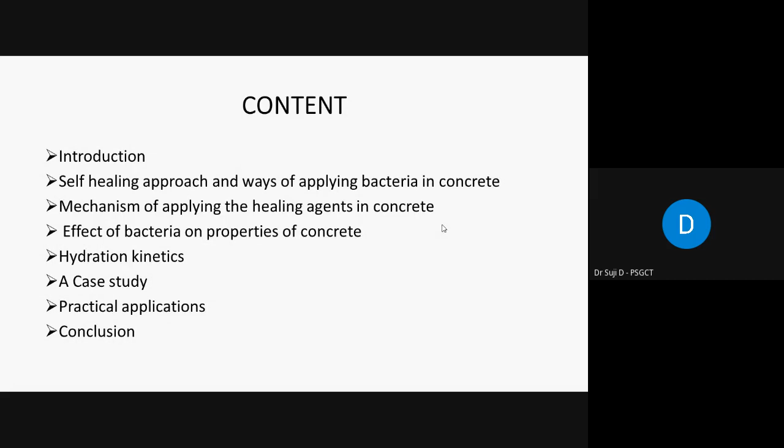I have arranged my presentation in this way: a brief introduction about self-healing concrete, self-healing approaches, ways of applying bacteria in concrete, mechanism of applying the healing agents, effect of bacteria on the properties, and a small hydration kinetics to make you understand. A small case study, if time permits, I will show, otherwise we can discuss it in the later stages, and some practical applications, and then let us conclude the session.

As we all very well know, due to the availability of raw material, affordability and durability, concrete is a widely used material all across the globe, and it also has superior compressive strength. However, a lot of concrete structures, including infrastructures like bridges, dams, etc., invariably suffer degradation and deterioration over a period of time.

This is due to the permeation or percolation of water, which affects the efficiency—efficiency here meaning the strength of the concrete. So one of the major causes of such deterioration is the formation of cracks. So the formation of cracks are in... let me highlight. Okay.

The formation of cracks is inevitable in concrete. These cracks may be either at micro level or macro level, which causes passage for dissolved particles in fluid.

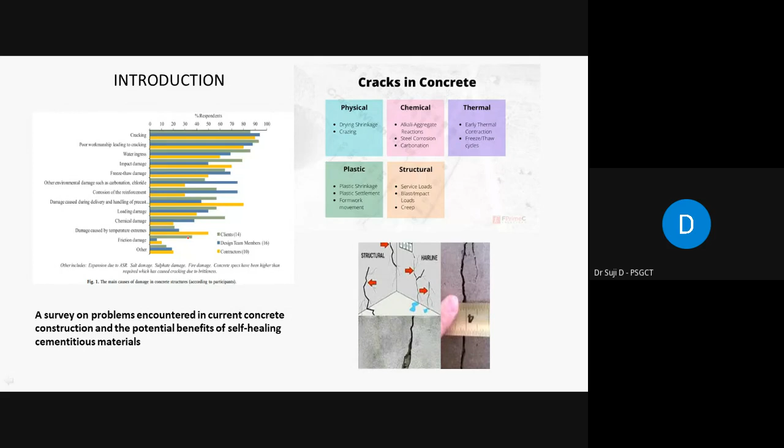Now, as I told you, conventionally there are different types of materials and methods that have been adopted to control the cracks or to mitigate the cracks or to arrest the damages which occur in concrete.

Various repairing techniques are available as of now, but they are highly expensive and time consuming processes. Concrete repair normally refers to bringing the structure back to its original form or regaining its original strength. So it can be classified either as cosmetic repair or sometimes rehabilitational repair, depending upon the type.

These repairing techniques or methods are classified based on types of cracks. You might have studied various types of cracks like live cracks, dormant cracks, voids, hollows, and honeycombs, scaling damage, spalling damage. We cannot simply use a single recovery or damage retrofitting measure applicable to all types of cracks. So it depends upon the type of defect, and accordingly the repairing methods vary.

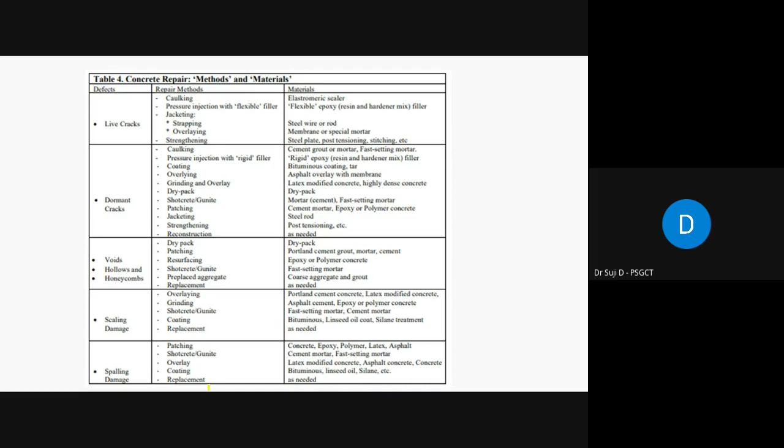So because of all these reasons, we have to go with an alternative approach called the self-healing approach. The modified cementitious form of the conventional concrete using such an approach is called self-healing concrete. Self-healing concrete is defined as the ability of the concrete to repair its cracks autogenously or autonomously.

There are two methods by which the self-healing process can be done: one is autogenous and another is autonomous. So it is called self-repair. Another name of this self-healing concrete is self-repairing concrete.

It imitates nature, like the automatic healing of our body wounds by the secretion of some kind of material. It mimics nature, so it is a biomimetic material.

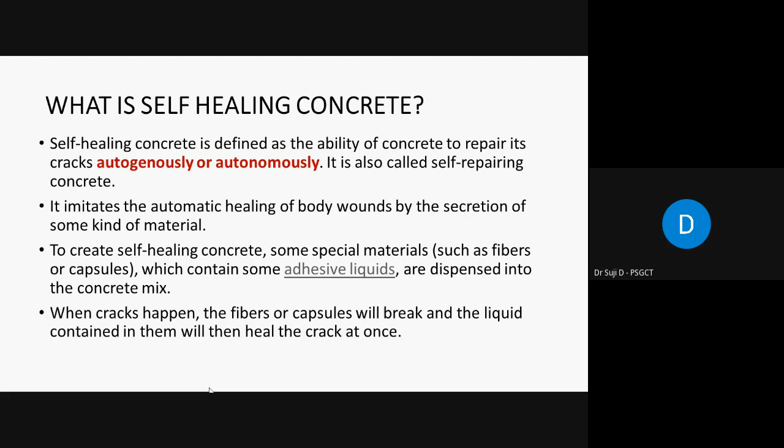To create self-healing concrete, special materials such as fibers or capsules, which may contain some adhesive liquids, are dispersed into the concrete matrix. When cracks happen, the fibers or capsules mixed along with the conventional concrete or cementitious system will break, and the liquid contained in them will disperse outside and heal the crack at once. This is a simple mechanism.

As I told you, this can be compared with nature: the wound initiation in our body, blood clotting, cell proliferation, and finally wound healing. So it somewhat mimics nature, and hence it is called self-healing.

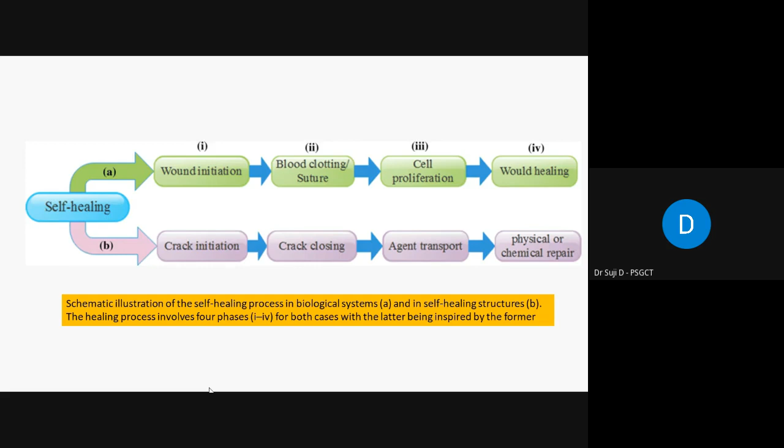This is the schematic illustration of the self-healing process in biological systems. The upper one, A, is the self-healing structure of the biological system, and B below is the one conventionally used in our systems. So we can imitate or mimic nature, or compare it with our conventional system that we are using too.

So there are certain major mechanisms of the self-healing approach. As I told you, the self-healing mechanism is defined as a process. It can be any process we follow, but by using it, the material itself finally ends up with a recovery and improvement of performance after an earlier action that reduces the performance of the material. So any material, any process, either autogenous or autonomous, we can follow, but finally the material heals itself. This is the basic definition.

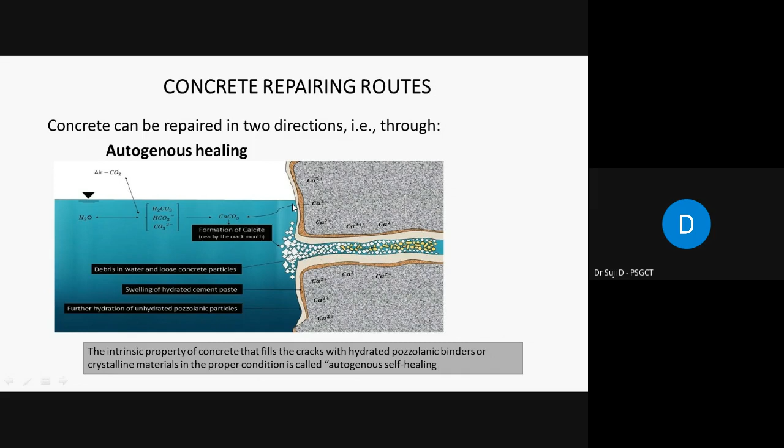In autogenous healing, the self-healing process takes place with products formed in the presence of carbon dioxide, dihydrate and water. Calcium silicate hydrate is our hydrated gel, formed due to the hydration of unhydrated cement with water.

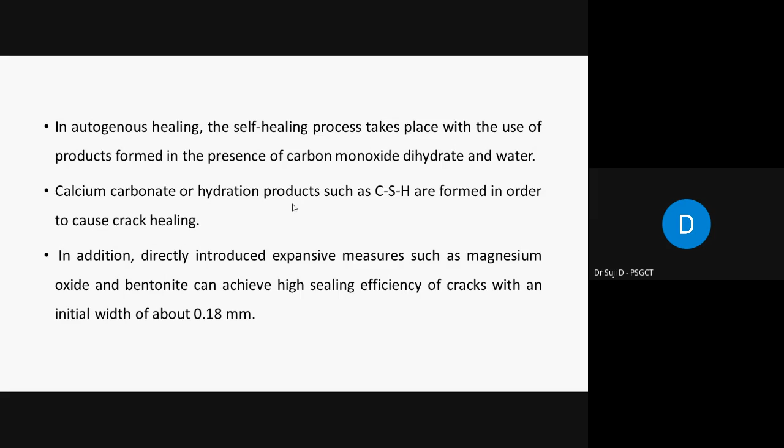In addition, expansive measures such as magnesium oxide and sometimes bentonite clay can be directly introduced to achieve high sealing efficiency of cracks with an initial width of about 0.18 mm. So if you have micro cracks of this range, definitely all these cracks will be autogenously healed by the natural healing process.

Now, what is meant by autonomous self-healing? According to RILEM Technical Committee, it is defined as the process of healing with material components that are specifically added into concrete for this purpose. That means they are called engineered additions.

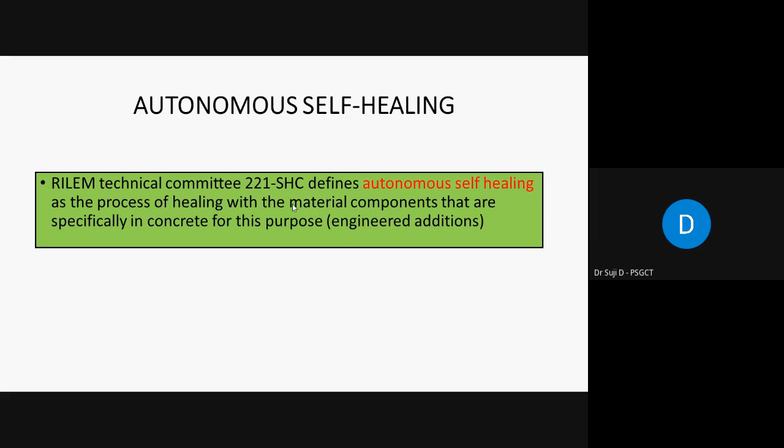So some type of additive materials in different forms are added to the cement or concrete to activate or further improve the natural healing process. That is called autonomous self-healing process. Among these, there are different types of autonomous self-healing processes, different methods by which it can be created. One among them, as I told in the beginning, is bacteria-based. Apart from that, there are a few other methods also used to bring about this autonomous healing process.

So let us look at that one. There are different materials used to bring in this autonomous healing process. One is utilization of bacteria.

As I told you, there are two processes: autogeneous and autonomous. Autogeneous is repairing itself naturally, whereas in autonomous, we have to give some additional engineered materials or substances to bring in the self-healing ability or process. So in the autonomous healing process, there are different types of materials used.

So what are all those different types of materials? Let us look at one by one. The major material used for this type of autonomous healing is bacteria. And not all bacteria, only some selective type of bacteria could be used for bringing in the self-healing property.

Apart from bacteria, some other mineral admixtures are also being used. They have a capability of forming this crystalline or expansive products while it is being initiated.

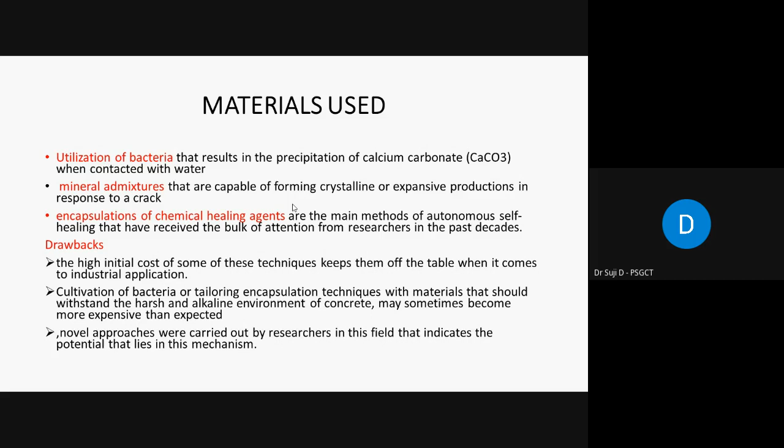So novel approaches were carried out by researchers in this field that indicate the potential that lies in this mechanism. So the mechanism is very well being appreciated to overcome the above said drawbacks.

So the self-healing concrete, as I told you, is of three broad domains: natural self-healing process, biological self-healing process, and chemical self-healing process. The natural self-healing process follows blocking of cracks, which forms calcium carbonate precipitation and blocking of the cracks by impurities, and further hydration of unreacted cement or cementitious materials, and finally expansion of the hydrated cementitious matrix and the final finishing of all the cracks.

Then biological self-healing process is a different one. As the chemistry of this self-healing process I have already explained. This is the biological self-healing process using different types of bacteria, and chemical self-healing process using capsules, shallow pipettes, and sometimes vascular networks. Let us see one by one.

There are two different modes of using chemical self-healing process: passive mode and active mode. And while coming to biological self-healing, biological precipitation of calcium carbonate is due to bacteria, and precipitation of polymorphic iron aluminum silicate is also possible due to some researchers who have conducted experiments and concluded this.

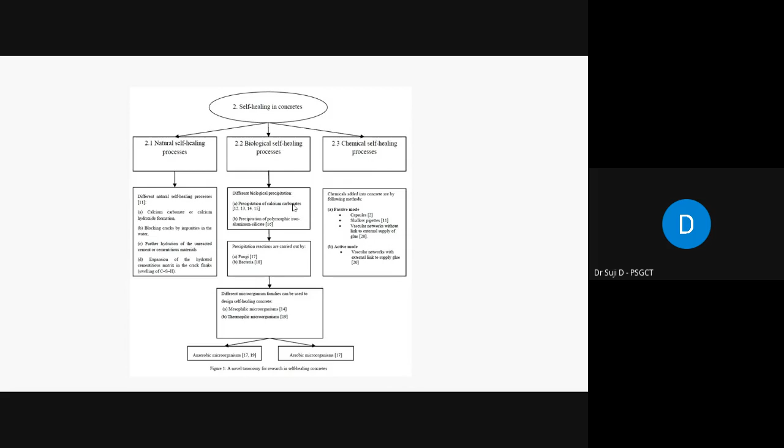Under this domain, there are two others: anaerobic microorganisms and aerobic microorganisms. I'll explain all these things later.

There are various causes that induce the self-healing mechanism. As I told you, the mechanism is the heart of the success of any self-healing concrete. The success is based only on the mechanism. The various causes inducing the self-healing mechanisms are physical, chemical, and mechanical.

The physical causes include swelling of the cement matrix near the crack opening due to absorption of water by the hydrated cement matrix. So we have a cement matrix, right? Once the crack is open, some micro cracks are open, so the cement matrix should be in a position to absorb the surrounding water. That is the physical cause.

The chemical causes can be attributed to two main processes: one is continual hydration of the Portland cement, and the other is formation of calcium carbonate. This is the chemical cause. Then the mechanical causes finally end up with autogeneous healing—it fills the cracks with fine particles originating from the broken concrete surface itself, or it may be transported to the crack by water. So these three causes induce the self-healing mechanism.

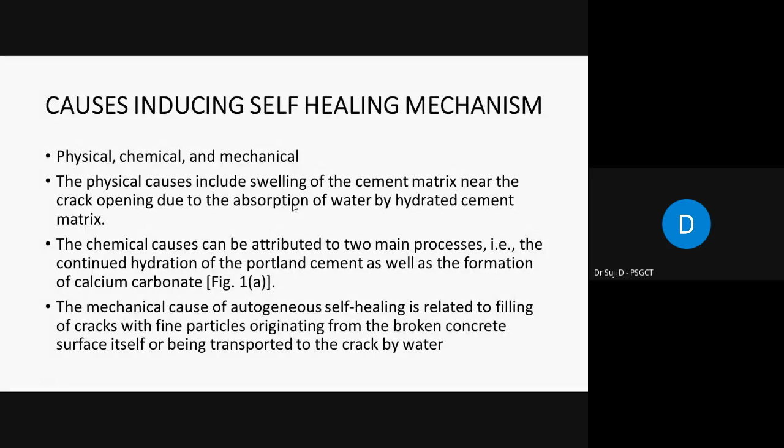This is the model of 5 steps taking place within these three processes: physical, chemical, and mechanical—swelling, continued hydration, calcium carbonate formation, and the mechanical cause of broken off fracture surface originally in the water. These mechanisms are common to all types, whether natural, biological, or chemical. This is the basic mechanism.

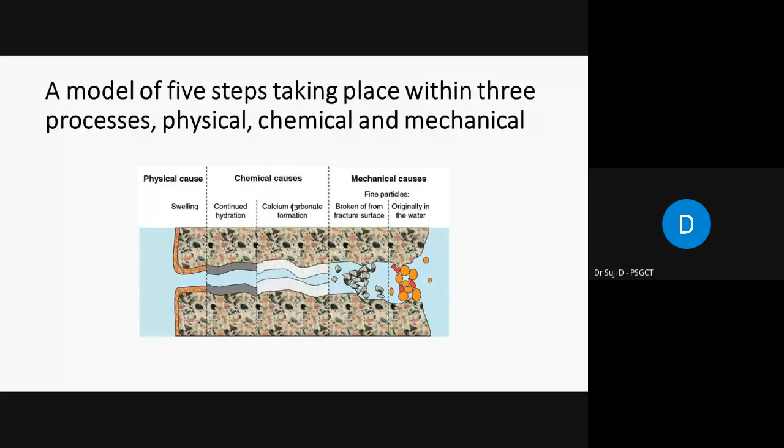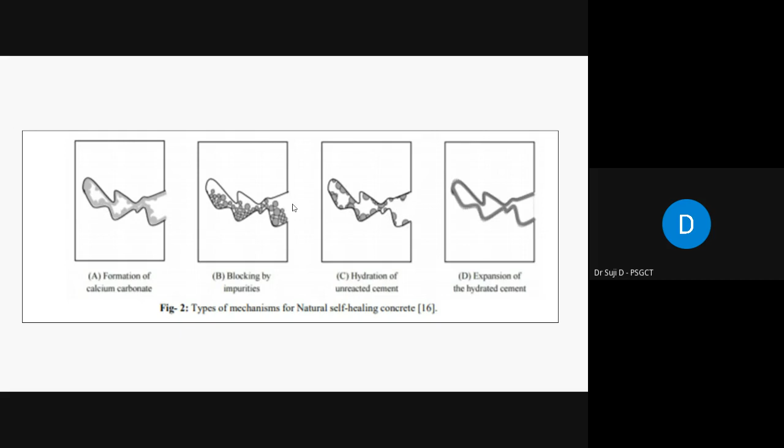So this is the chemical reactions that I have explained: the formation of calcium carbonate, blocking by impurities, hydration of unreacted cement, expansion of the hydrated cement. These are part of the natural process.

Now let us come into the chemical self-healing process. This is one of the novel techniques. Here we are using chemical substances—another way of healing the concrete by injecting chemical components into the concrete.

Several researchers have attempted different types of chemical substances for their concrete. This is called artificial healing, as opposed to the previous one, which is natural healing. Some researchers name it artificial healing.

To design chemical self-healing materials, various types of glues are used. The major techniques used in this chemical self-healing process involve glues, and these healing treatments use hollow pipettes and vessel networks which contain glue. The vessel networks use encapsulated glue. I'll explain one technique: vessel networks and hollow pipettes which contain glue.

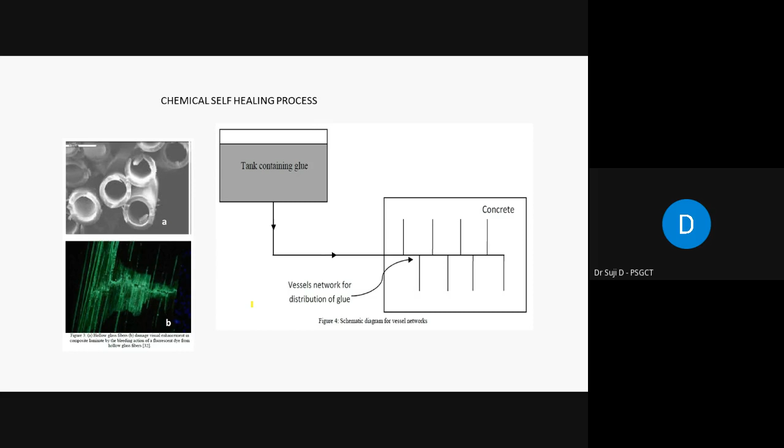So you can understand very well about this mechanism. This is the crack being propagated into the concrete, and vessels connected to external tanks contain glue. Once the formation of crack is initiated, minute networks propagated inside the concrete area rupture due to internal stress, similar to our blood vessels rupturing by the crack. Since it already consists of a glue-like substance, once cracked, the glue-like substance enters into the crack and heals it. This type of research has been carried out by a few researchers.

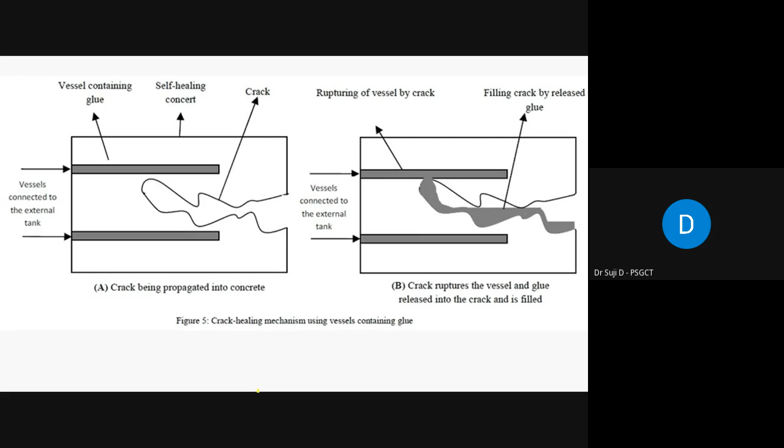But as I told you earlier, upscaling these mechanisms to bring into reality is very, very difficult because of the cost involved and the huge research technical gaps that are there. So in order to sort out all these problems, further research is still needed to bring this into reality.

This is encapsulated glue, another form of technique. Here, as I told you, it is like small capsules, microcapsules, or it may be nano capsules, which carry the glue as a self-healing agent. These capsules may be dispersed in the concrete matrix.

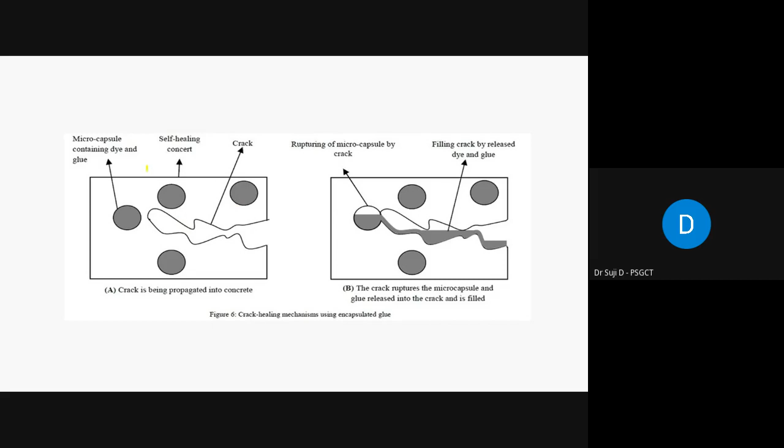One researcher attempted this microcapsule technique for self-healing concrete. When the crack initiates and meets the microcapsules, due to internal stress it may fracture or break. The material filled in the capsules can then enter into the cracks and heal them. So there are different ways: the vascular technique, another type of chemical self-healing process or artificial healing process, and this micro-encapsulated healing process.

And this is the schematic diagram of crack healing by microorganisms. This is called biological concrete or bacterial concrete. It is a new objective or new area in civil engineering, under modern concreting technology.

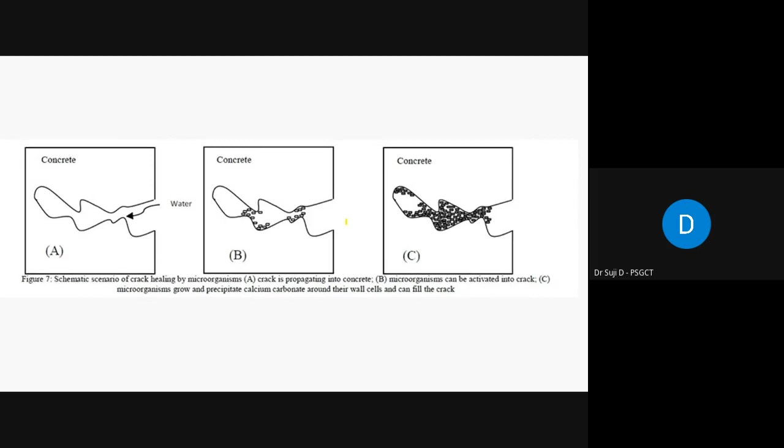This bacterial concrete basically depends on microorganisms, which are majorly used for bacterial concrete. Sometimes these microorganisms can be directly dispersed in the concrete, or sometimes carriers are needed to carry the bacteria into the system. Different mechanisms are tried, and one of them is microorganisms filled in the form of a capsule dispersed in the concrete. During expansion and further stresses, the capsules break, releasing the microorganisms and causing the healing process.

So the biological self-healing process attempts the use of microorganisms to design self-healing concrete, which is called bioconcrete. Bioconcrete can grow almost anywhere, since microorganisms can be seen everywhere. Wherever you look, there is definitely some microorganism present; they are invariably present everywhere.

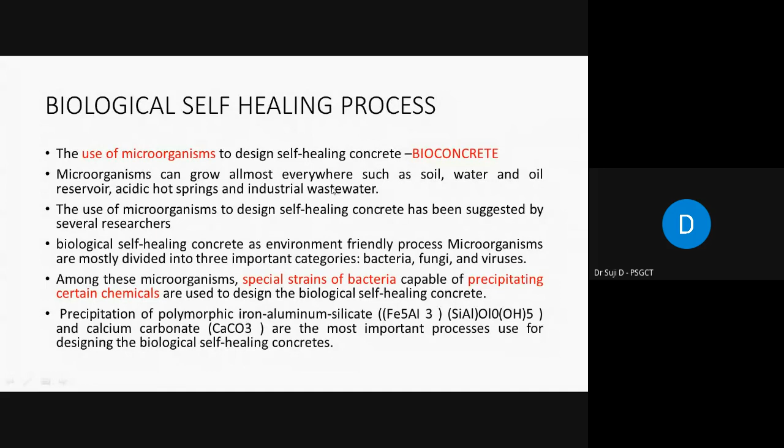There are different process routes. One is that microorganisms can be added to the concrete through different approaches, such as addition of microbial broth directly into the fresh concrete. That means when microorganisms of a certain quantity are dispersed in concrete, they will cultivate themselves within the concrete. This is called microbial broth directly into the fresh concrete.

Sometimes spore forming bacteria are also used, because in order to withstand the alkaline environment, spore forming bacteria are very effective. This spore forming bacteria is also attempted to use for mineral precipitation. Sometimes immobilized form onto silica gel or activated carbon is also used. These microorganisms can be used either in mobilized form, where they are active always within the concrete, or in immobilized form, where whenever a crack opens and reaches an oxygen source, it will enter into the reaction. That is called immobilized form, using silica gel or activated carbon.

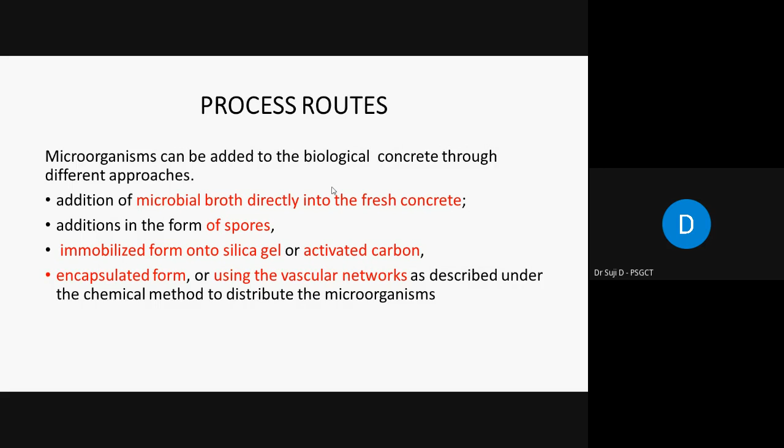What are the controlling factors for growth or activation of this bacterial precipitation? One is the pH of the concrete pore solution, which controls it and depends on the type of cement being used. The pH, temperature, and moisture content of the concrete are typically not suitable for the growth of bacteria. Actually, high pH, high temperature, and high moisture content are all unfavorable conditions.

Only the optimal parameters are selected for a particular type of microorganism used, since this is not uniform for all microorganisms. The type of bacteria you use depends on different optimal conditions that you have to check out. Hence, in certain cases, resistant forms of bacteria, the spore forming bacteria I mentioned earlier, are used instead of fresh microbial broth.

Alternatively, encapsulated microorganisms can also be used to withstand the harsh conditions of concrete, though this is a highly expensive and complex method. The use of vascular networks is also encouraged to distribute microbial broth throughout the cementitious matrix, which is another way of protecting the microorganisms from improper conditions. However, all these approaches are complicated and subject to lack of constructability using current technology, so they remain at the theory level only.

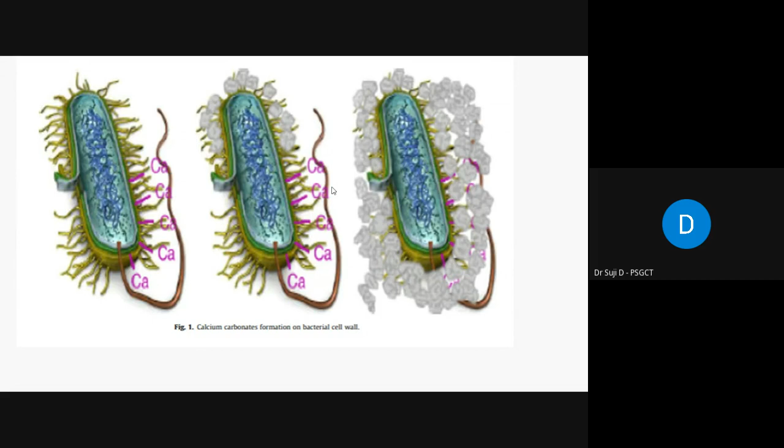Next is identification of bacteria and development of bacterial concrete. This is a typical bacterial cell wall and precipitation using single cell microorganisms. Microbial mineral precipitation comes from the metabolic activities of useful bacteria in the concrete. As mentioned, not all microorganisms are suitable; only mineral precipitating bacteria are selected.

This process might take place inside the cell wall, or sometimes outside the microbial cell, or sometimes it may happen within the concrete itself. Bacterial activity frequently causes a change in the solution chemistry, resulting in oversaturation and mineral precipitation. So the application of these biological concepts to concrete could lead to the development of a novel material known as bacterial concrete.

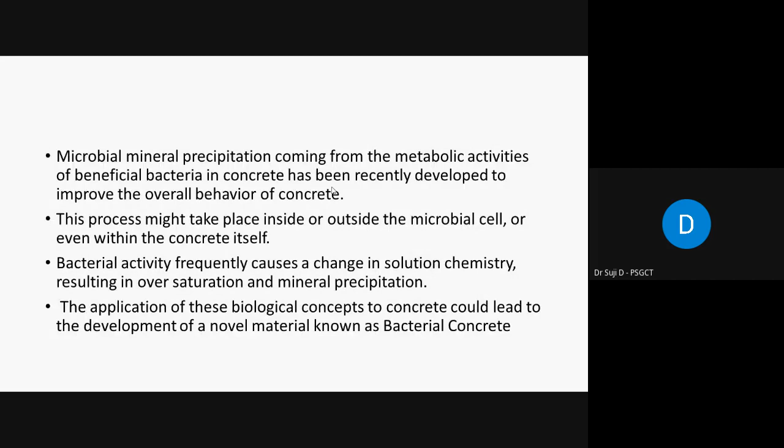Historical perspective: bacteria are a single cell species. They occur in varying forms and sizes. They are omnipresent everywhere in the ecosystem, and are also available in organic matter, plant and animal life bodies. Typically there are 40 million bacterial cells in 1 gram of soil.

The first person who discovered bacteria was Antony. In 1676, he discovered bacteria using a single lens microscope. Christian Gottfried introduced the word bacteria in the 19th century, and Louis Pasteur in the 19th century showed that the process of fermentation is caused by the proliferation of microbes. Pasteur was an early advocate of the germ theory of disease along with his contemporary Robert Koch.

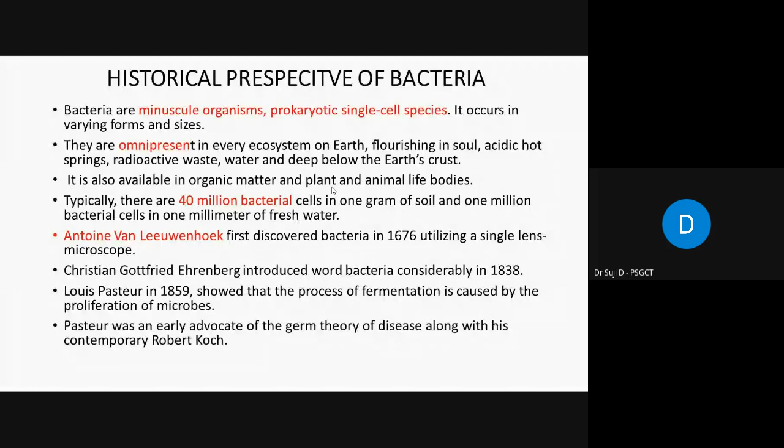Based on Pasteur's name, there is one bacteria, Bacillus pasteurii, which is another type of microorganism. Gram positive and gram negative are the two broadly classified cell wall types of bacteria, named from the cell reaction. Gram staining is a method of differentiating bacteria, a test procedure for diagnosing the taxonomy of bacterial species. So gram positive and gram negative are the two broadly classified types of bacteria based on cell wall type.

Bacteria are generally cultured in the laboratory using a solid medium or sometimes a liquid medium. Solid growth media like agar plates are used to isolate bacterial strains from pure cultures. However, liquid growth is also employed when growth measurements or high cell volumes are needed. If you stir the liquid media continuously, it will use this liquid as a medium for the growth of bacteria.

This bunch of bacteria can be easily split and transferred, but it is difficult to isolate a single bacterium from the liquid medium. The use of selective media can aid in identifying certain organisms.

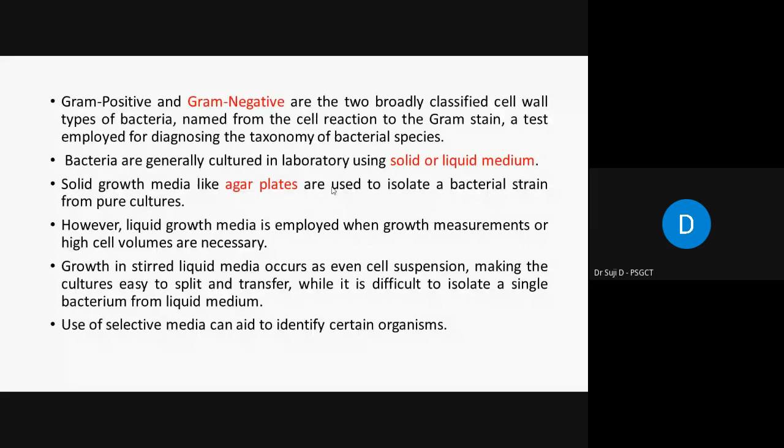There are several stages of bacterial growth: the lag phase, stationary phase, death phase, and log phase. Bacterial growth normally follows all these four stages of development.

When a bacteria population first enters a high nutrient environment that allows for growth, the cells must adapt to their new environment. This is the initial phase — the bacteria is given some food so it can grow into larger numbers, and for that, some nutrient is needed. When the bacteria population first enters a high nutrient environment that favors growth, the cells must adapt to their new environment.

The first growth phase is the lag phase, a period of slow growth. Initially the growth of the bacteria or microorganisms will be slow. Then when the cells adjust to the high nutrition environment and prepare themselves, rapid development takes place. The lag phase has high rates of biosynthesis, where proteins are created which are needed for rapid growth.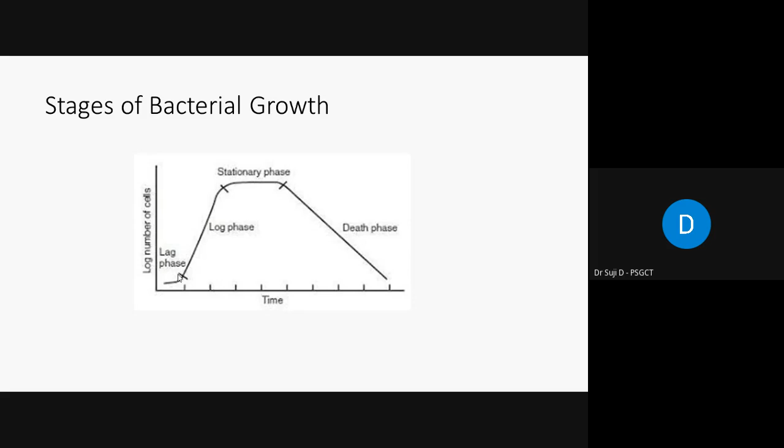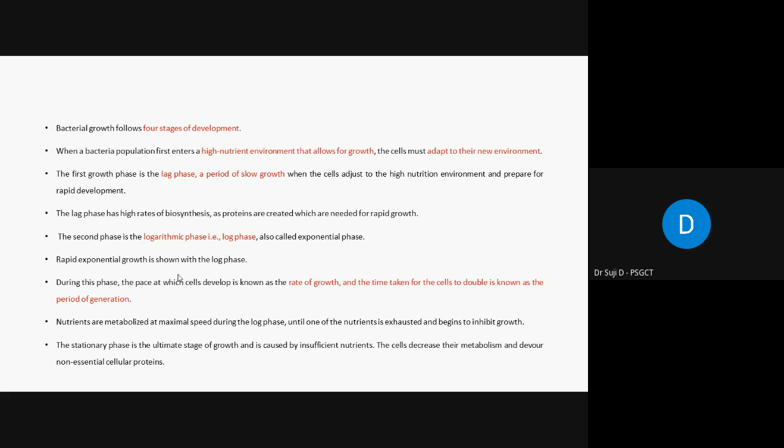So if you go with stationary phase, there will not be any growth of microorganism. That means all the nutrients are used up, metabolized. So it is a stationary phase, right? So the cells decrease their metabolism and devour non-essential cellular proteins. So at that stage, there will not be any further growth, right?

And there are different types of bacteria: Cohnii, Filla, Bacillus pasteurii. There are n number of microorganisms. New microorganisms are identified day by day. So under a broad family, there are different types of microorganisms available by name.

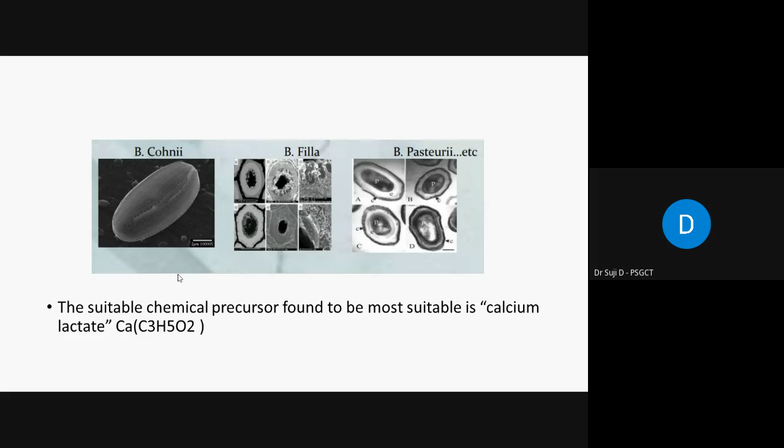So the suitable chemical precursor found to be most suitable. As I told you, some nutrients are needed for the growth. So calcium lactate, majority of the researchers used calcium lactate as a source or feed or nutrient for the microorganisms to grow further.

So bacteria is normally classified based on 3 types. One is shape, another is based on strain, gram strain, that is cell wall type, and third one is oxygen demand. So based on the shape, it is spherical, rod-like, spiral. So all the microorganisms are not unique - they have different shapes, some spherical form, some rod-like, some spiral form, etc.

Whereas cell wall type, based on the classification, it is based on two types: gram negative and gram positive. And based on oxygen requirement, it is aerobic - some needs oxygen, some not need. So aerobic and anaerobic microorganism, right?

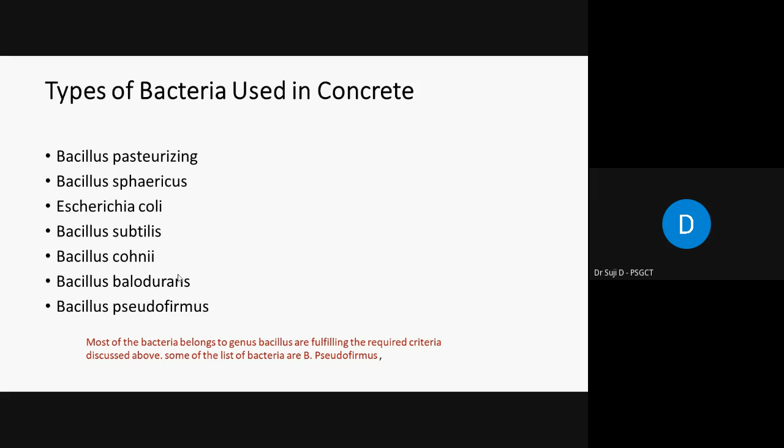And these are few types of bacteria used in concrete: Bacillus pasteurii, Bacillus sphaericus, Escherichia, Bacillus subtilis, Bacillus cohnii, Bacillus halodurans, and Bacillus pseudofirmus. These are all Bacillus groups, normally fulfilling the required criteria for the self-healing property.

So Bacillus bacteria is utilized in conjunction with calcium supplement, like calcium lactate, that is the feed for the microorganisms to grow further. So these compounds are mixed into the wet concrete during the preparation itself. Then this can survive up to 200 years in a dormant state.

Whenever it meets a favorable source for its growth, it opens up and heals itself. So this is how our ancient historical buildings constructed some 10,000 or 20,000 years before could survive. So some type of research is going on based on this understanding.

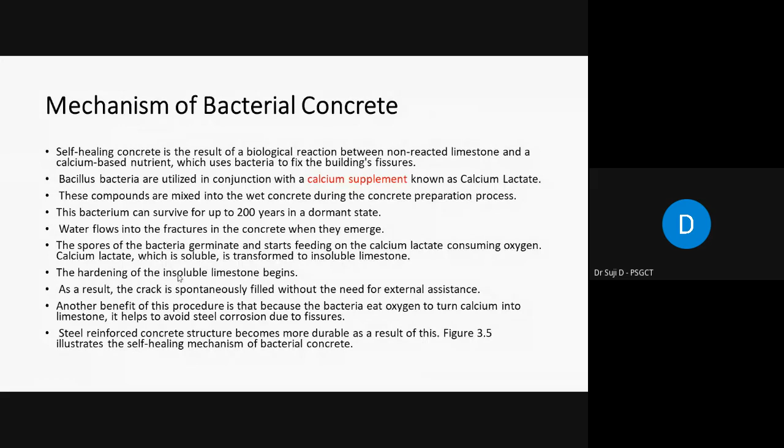So as a result, the crack is spontaneously filled without the need for external assistance. Another benefit of this procedure is that because the bacteria use oxygen to turn calcium into limestone, it helps avoid steel corrosion due to fissures. So steel reinforced concrete structures become more durable.

This is the cycle. So the chemical process of bacterial or self-healing concrete is similar to our natural healing process. So initially calcium hydroxide is formed when water comes into reaction with the unhydrated calcium.

Unhydrated calcium in concrete right now - whenever there is an unhydrated cement particle. So nowadays we call it a cement particle. In ancient structures, they have used limestone, so it also has some calcium source. So whenever this calcium source reacts with water, it forms calcium hydroxide, due to microorganisms acting as a catalyst.

So this process continues because of the additional water molecule. After that, the limestone hardens and fills the cracks in the concrete.

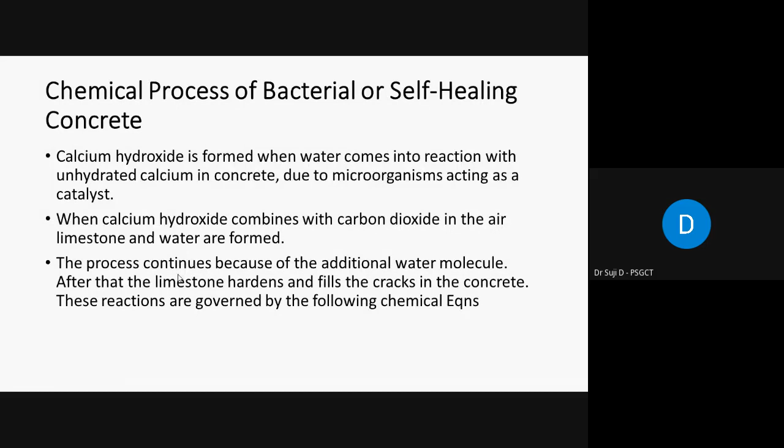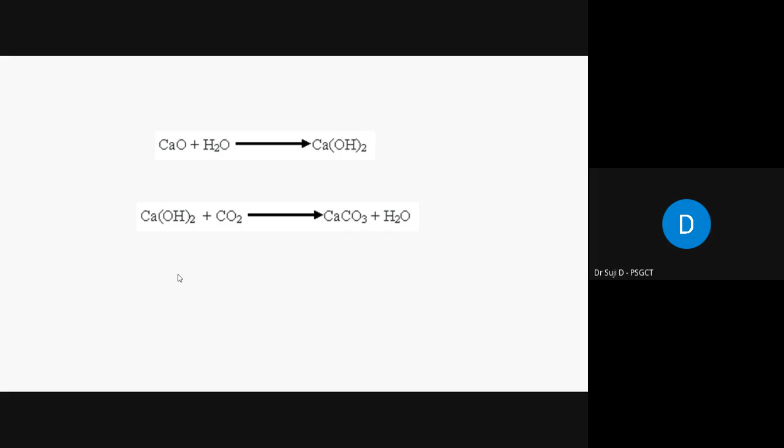So these reactions are governed by the chemical equations: calcium oxide reacts with water to form calcium hydroxide. This calcium source comes from the unhydrated limestone, and this calcium hydroxide, activated by the microorganisms, takes up that CO2 and forms calcium carbonate.

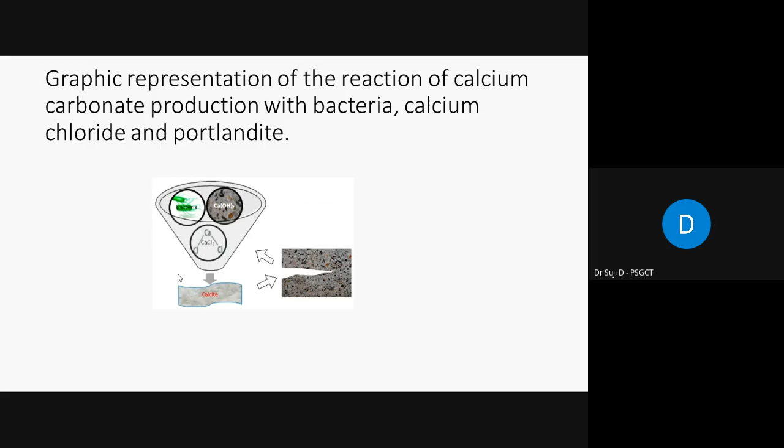So this is the graphical representation of the reaction of calcium carbonate production with bacteria, calcium chloride and portlandite. So what are the challenges?

The construction community lacks knowledge or research in this microbiological process, and our construction community is not much aware of the biotechnology part in our hands.

Bacteria are considered of various types, and it needs lots of precautionary measures and understanding of the bacteria and its harmful effects, right from the root. Some types of microorganisms are harmful to health, so understanding this classification and types is very important.

The product and performance of microbially induced calcite precipitation, MICP, may vary geographically and environmentally, and requires adaptation to local conditions. The nature of MICP is not unique - geographically, different types of microorganisms are available. A type available in the US or UK may not be available here, maybe because climatic conditions are different. So adapting microorganisms to our local conditions is very important.

Standard protocols need to be developed concerning testing and acceptance criteria. Survival of bacteria in high alkaline pH environments is very challenging. Encapsulation of bacterial cells using polyurethane, silica gel, and microcapsules is also highly challenging, as is reduction in production cost. Answers to all these questions and problems must be found - there is a huge technical gap in this area.

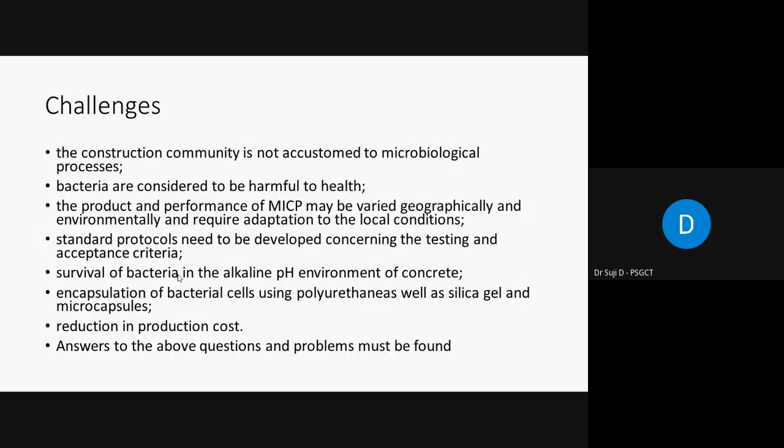Due to lack of time, I could not share my research work. We attempted some work with MSAN - we isolated bacteria from it and used it to check efficiency with some mechanical properties and other things. But due to lack of time, I could not continue that session.

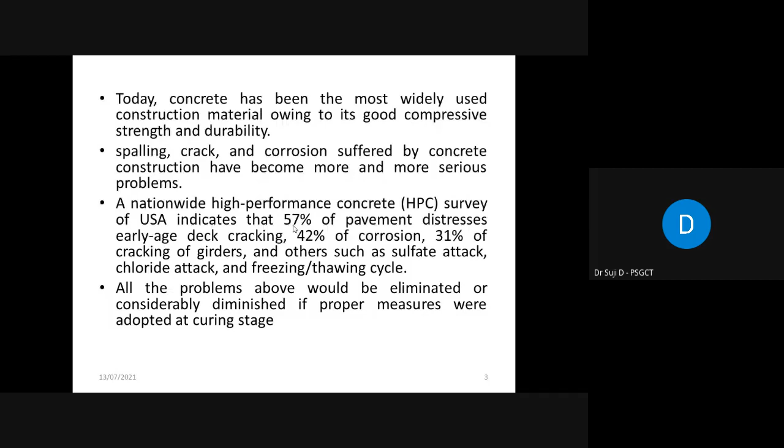So, the importance of curing: curing of concrete is very important immediately after casting, to avoid potential shrinkage, settlement, and thermal deformation which occur at early ages. Early age damages are more prone, with withdrawal of moisture as most of the water is taken for hydration. So these early age problems could be sorted out by proper curing.

Proper curing is significant for concrete to satisfy the requirements of mechanical properties as well as durability. Improper curing ends up with more cavities or potholes, whatsoever it may be. This will be the source for damage in future, reduces the mechanical strength as well as the durability of the structure.

So we have to go with an ideal curing process. Ideal curing process is creating an ambient condition of moisture, humidity and temperature to the structure, which unfortunately cannot be fulfilled in most construction projects. Though we speak theoretically more about curing, real implementation, if you look at, is very lagging, and this lagging reduces the durability of the structure as a whole.

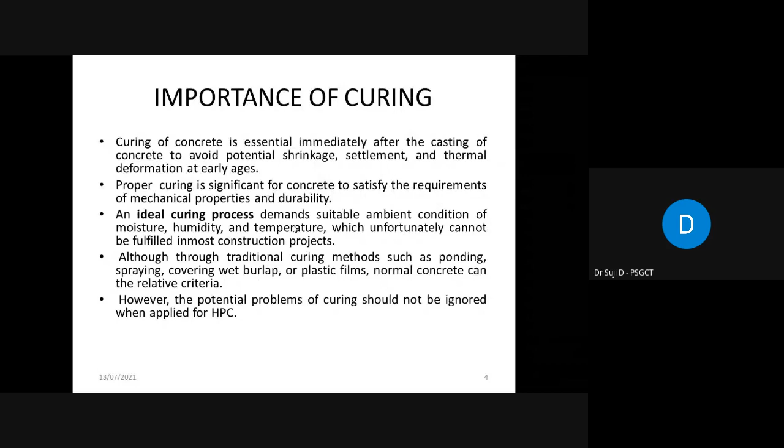However, this curing - though by generic name we call it curing - for the strength properties of conventional concrete, this curing terminology or process is very important for high performance concrete.

High performance concrete is characterized by low water to binder ratio and high volume additives - sometimes silica fume may be used, sometimes fly ash may be used. So high volume mineral admixtures may be used to achieve the performance which we require.

So it is normally characterized by low water to binder ratio. We use low water to binder ratio, but again we encourage more quantity of mineral admixtures, high volume additives. Under this condition, the penetration of external water is very, very difficult, and only superficial and traditional curing mode is attempted.

What is the role of mineral additives in high performance concrete? During hydration of the cement particle, it reacts with water and forms its own hydrated compounds - calcium silicate hydrate - with different volumes based on its mineral composition. Tricalcium silicate forms a certain percentage of CSH, and dicalcium silicate forms some percentage, like that. It depends upon the mineral composition.

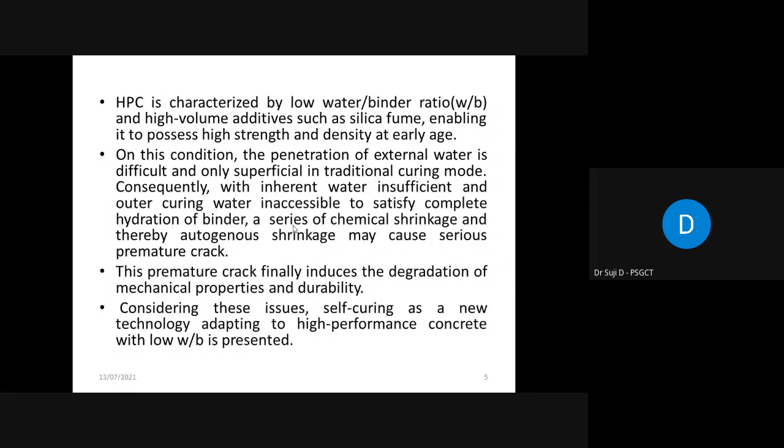Considering all these issues, self-curing is very much essential as a new technology, especially for high-performance concrete with low water to binder ratio. So now let us define what is meant by self-curing concrete, or internal curing method by name. Different names are there, right?

The American Concrete Institute in 2010 called it internal curing, defined as supplying water throughout a freshly placed cementitious mixture using reservoirs via pre-wetted lightweight aggregates that readily release water as needed for hydration or to replace moisture loss through evaporation or self-desiccation.

So here a new term like self-desiccation is used. What does self-desiccation mean? That is the water which is consumed by the cement particle to convert it into its own products, is called self-desiccation. That means it consumes the water which is needed for the chemical hydration. That is called self-desiccation.

So the American Concrete Institute defines self-curing or internal curing as the supply of pre-wetted aggregates. They have mentioned lightweight aggregates, but nowadays we move ahead with not only aggregates but many other systems or processes to initiate this self-curing technology. According to ACI 2010, it is through pre-wetted lightweight aggregates that readily release water, because the nature of lightweight aggregate is highly porous.

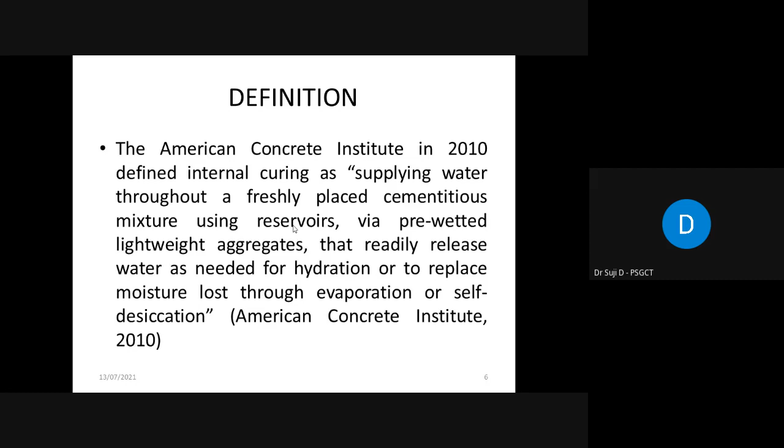So these pre-wetted aggregates act as reservoirs. Reservoir here means source of supply. So it becomes a source of supply whenever the system needs water. It will supply that water through some mechanism. So this is the definition as per the American Concrete Institute, right?

So this is ACI's definition, and here is another definition, a mechanism explained about self-curing concrete. According to ACI 308, internal curing refers to the process by which hydration of the cement occurs because of the availability of additional internal water that is not part of the mixing water. So you need to know the difference between the mixing water and the hydration-required water.

There are two types of water out there: one is chemically combined water, another one is free water, right? So this water is taken by special substances, which supply it in future if the cement system or cement mortar requires it for hydration—then it will give away that water. So this is called internal curing as per ACI 308.

So according to this definition, curing can be divided into two types: naturally, one is external curing and another is internal curing. So you have two types—external curing and internal curing. The conventional concrete curing methods are called external curing methods, such as water curing, membrane curing.

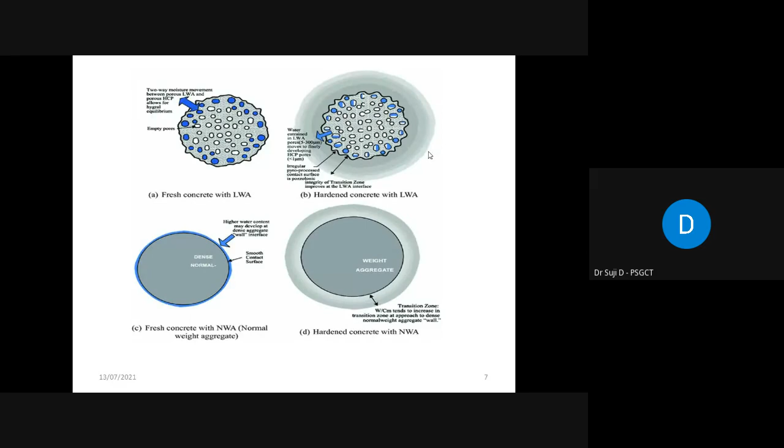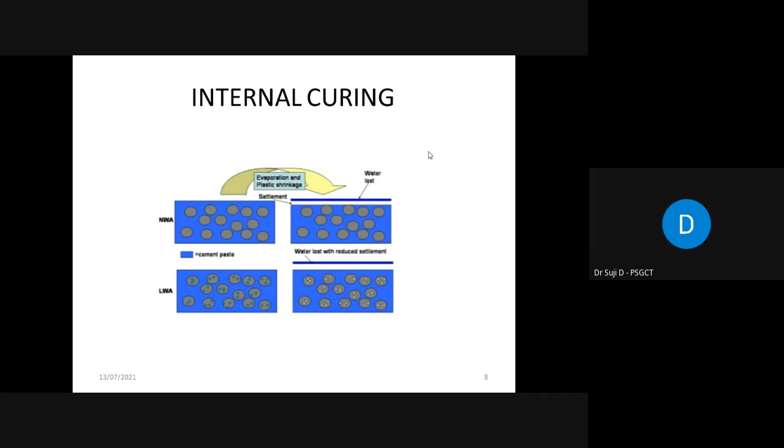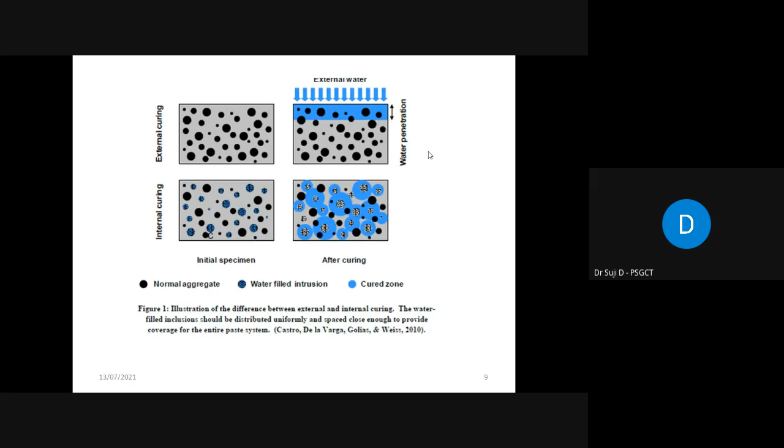This is the external curing process, curing by getting water from outside, with external water source getting into the aggregate. Whereas in the case of the internal curing method, water is available within the system and is released whenever it is needed, achieved by replacing part of the aggregate by lightweight aggregate or using admixtures.

So from inside to outside, self-curing is a process that takes place from inside to outside, reducing autogenous shrinkage and self-desiccation, especially for high performance concrete where low water cement ratio is needed. Durability and workability of self-curing concrete is improved compared with conventional air-cured concrete, while mechanical properties may be either enhanced or compromised. We cannot expect much enhancement of mechanical properties due to this addition of self-curing agents.

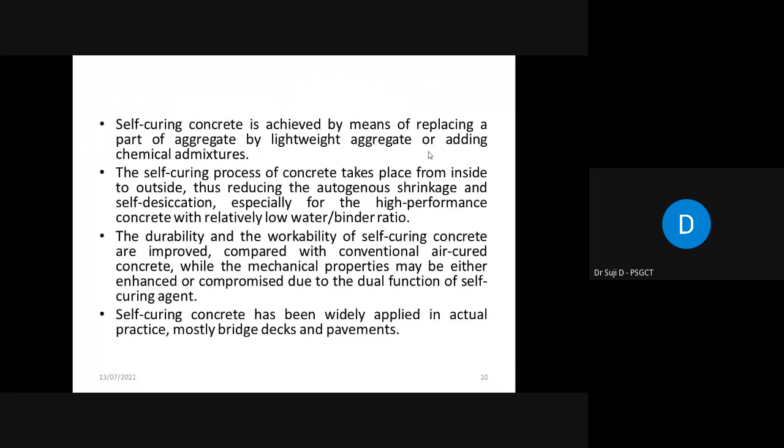Performance can be enhanced, not the strength. Self-curing concrete has been widely applied in actual practices, mostly bridge decks and pavements.

This is the mechanism, similar to what I have explained. Here they have attempted fly ash aggregates, so wet porous fly ash aggregates are used under the same humidity condition under hygral equilibrium.

Relative hygral equilibrium, if it is 0, means the same humidity conditions exist between the fly ash aggregates and fresh cement paste, and there will not be any movement of absorbed water. Once the humidity difference arises, the mechanism starts. The self-curing process starts up with this difference of humidity between the fly ash aggregates and hardened cement paste.

So the initiated absorbed water in fly ash aggregate is released into the hardened cement paste to help the hydrated cement paste use it, so that unreacted cement particles, if found in that medium, will take that water and start hydrating. So the hydration process continues even with the non-availability of external water.

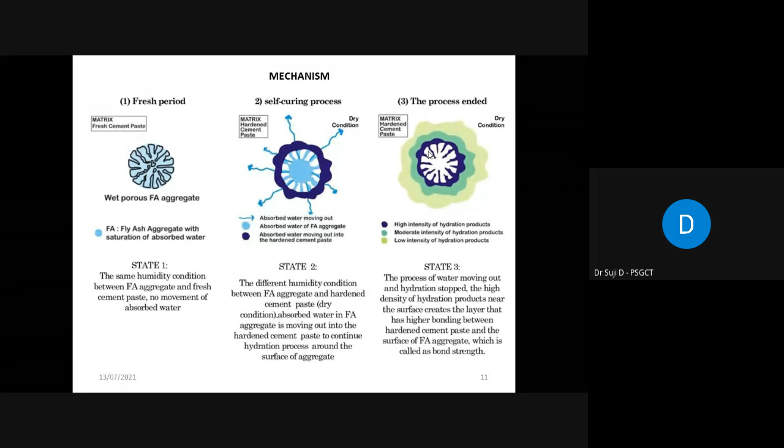The process of water moving out and hydration stops when a high density of hydration products near the surface creates a layer. Even if the fly ash particle is surrounded by denser particles, if that denser medium prevents the movement of absorbed water outside, at that stage the movement will be stopped. This is the mechanism, and these are the various phases of water available in the phase.

This is the microstructure of the cement paste. Capillary water is available, and some gel water, that is physically bound water in between the CSH gel, is available, and chemically combined water, that is called non-evaporable water, is also present. These are different forms of water taken up by the hydrated cement paste.

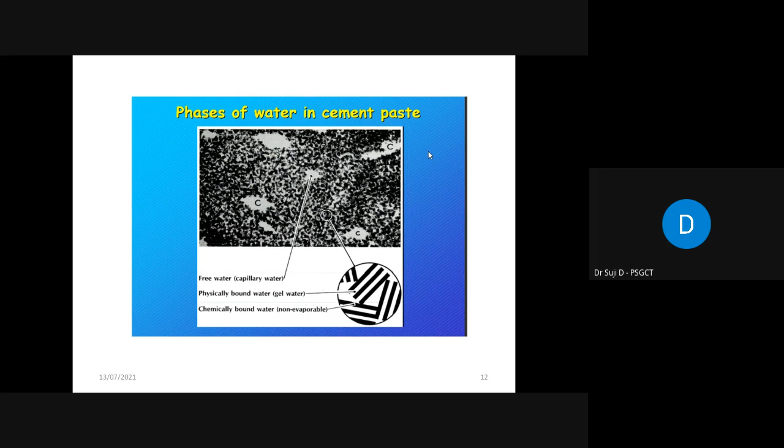According to Powers' law, which is an invention by Powers, it is used for the measurement of the quantity of water taken up by the cement system. Based on that, we can fix the water needed, that is water-cement or water-to-binder ratio, for effective performance in most cases, fixed based on this Power's model. This is a fundamental model used for calculating the quantity of water to binder ratio.

According to Powers' measurement, chemically combined water, also called non-evaporable water, is 0.23 grams of water bound per gram of cement during hydration. This water is called chemically bound water, and it is non-evaporable also. You can evaporate this water only if you heat the system up to 105 degrees centigrade.

Until then, this water will not be taken out. So it is an integral part of the structure of the gel or CSH gel. On the surface of the gel solid, CSH is a hydrated calcium silicate hydrate gel.

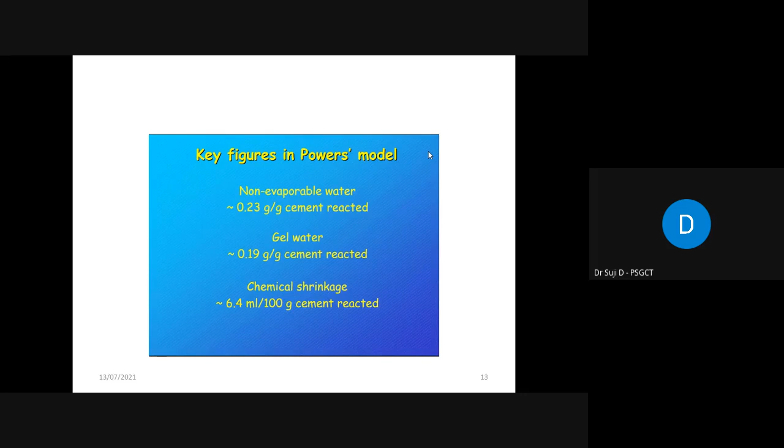The relative humidity is one of the important parameters. Based on this relative humidity, the reaction products formed during cement hydration are considered, whether they come from the internal source due to internal curing or from external curing. So relative humidity plays a vital role, especially in the self-curing system.

So this is the Powers model. Let me check the time. Let me take some 5 more minutes to complete this.

Here, when the water cement ratio is about 0.2, there is not enough capillary water for hydration of the cement. If it is 0.42, water may be available fully for the system for hydration. Cement hydration requires that the produced calcium silicate hydrate should have certain porosity.

According to Powers law, in a water-cement system, the majority of water depends upon the degree of hydration. If it is a completely hydrated system, some water will be taken up for formation of CSH, some pores take up this water as gel water, and some water is taken up by the system as capillary water.

In the case of a sealed system, like if the water cement ratio is less than 0.42, the quantity of water naturally taken up by the system is only about 75% of this water. So this is the Powers model; I suggest you this.

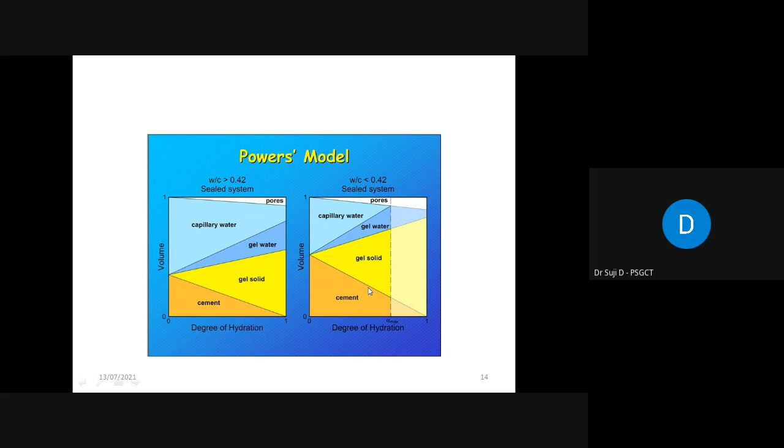There is a lack of time, so I could not explain much on this Powers model. Those who want to pursue research on self-curing concrete should focus more on this Powers model to study in detail about the transport and transportation of water within the system, how it happens, the mechanism, and other things. Once you understand these basic concepts, that will help you identify a better self-curing system to get maximum efficiency.

So what is the current progress of self-curing concrete? Many researchers have worked on self-curing concrete, mainly focusing on three problems: the type of curing agent and how much curing agent is needed is one area of research. The second area is to what extent self-curing reduces shrinkage and enhances durability.

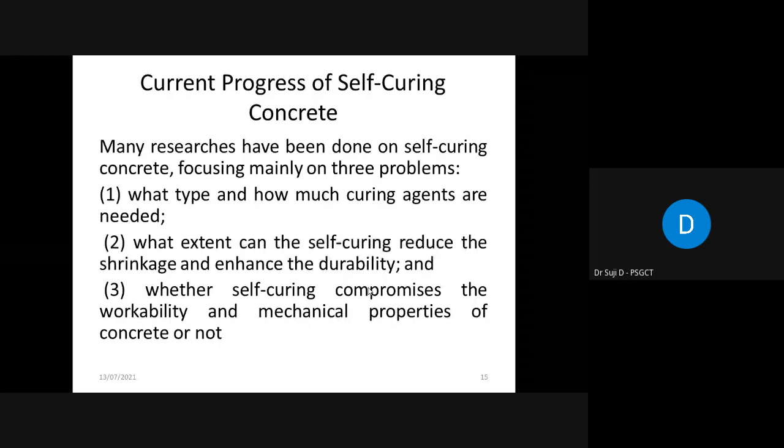Then third is whether self-curing compromises the workability and mechanical properties of concrete or not. If you search the literature on self-curing of concrete, major research papers available can be classified only into these three domains. So those pursuing research can do a deep, elaborate research survey to identify the technical gaps mentioned in these three domains, and further problem identification can be done for your research.

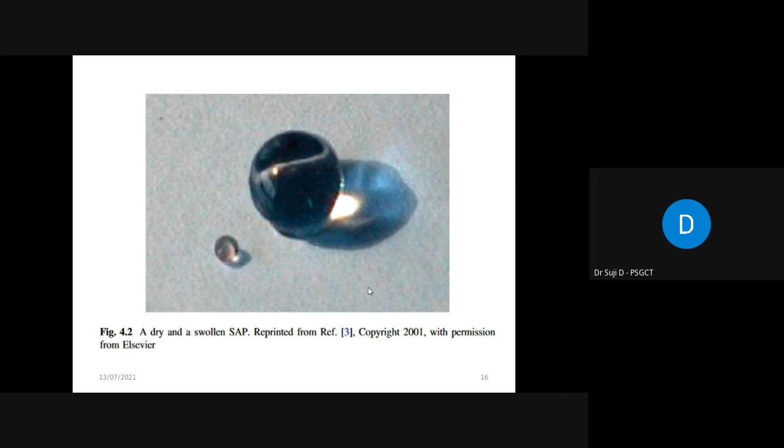So this is a dry and a swollen SAP. As I told you, this can absorb 1000 times more water than the original. So there are some challenges.

Because of the variety of complex chemical reactions and physical changes in the cement hydration process, the microstructure of the cement-based material undergoes transformation from suspension, viscous liquid into a solid, from gel form to finally a hard form. In between this transformation stage, many mechanisms take place, so understanding those mechanisms is very essential.

The hydrating materials are easily subjected to autogenous shrinkage and thus to cracking risk. In addition, the final properties including mechanics and durability are inherently controlled by the microstructure of the cement-based materials. The microstructure consists of solid and porous phases, and the spatial and topological arrangement of these phases is ultimately responsible for the strength and transport properties of the cement paste, which is very important.

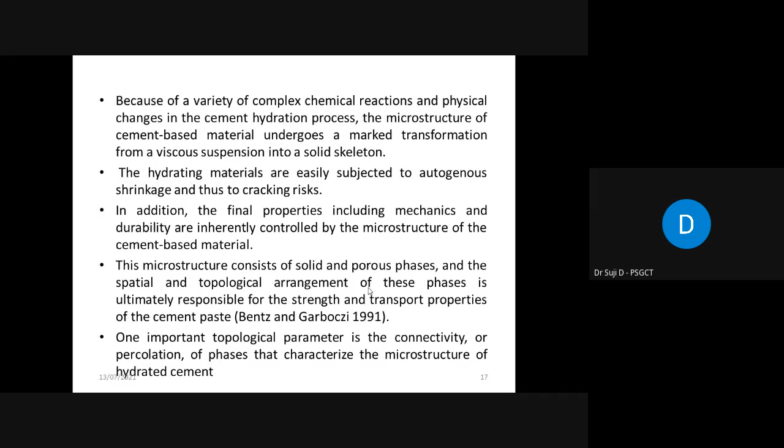This is important for those who want to do research on self-curing concrete. One important topological parameter is the connectivity, percolation of phases. Without connectivity or percolation, the transport or movement of water from the self-healing material to the unreacted cement is not at all possible. So connectivity, network, percolation, and transport properties of the cement paste are very important here.

The percolation of phases is interpreted as alpha. When alpha is 1, it indicates that phases are fully connected. When alpha is 0, it indicates that no connected pathways are there. So percolation theory can be applied to explain the macroscopic performance of mechanics and durability, and transport properties such as ionic diffusion, fluid permeability, and depercolation of capillary pores. All these things develop the strength of the system.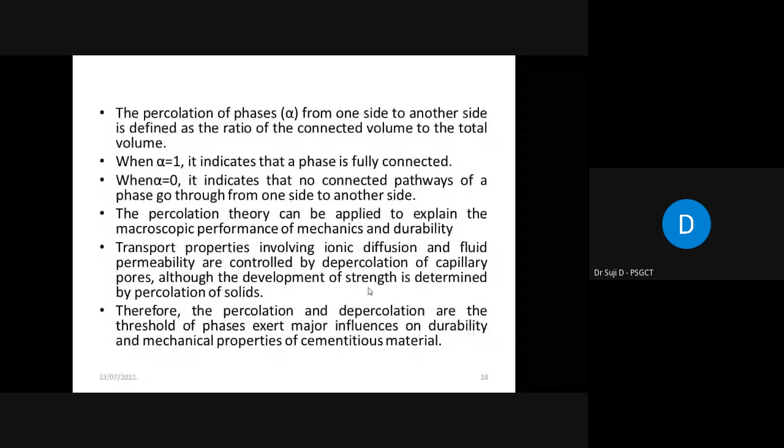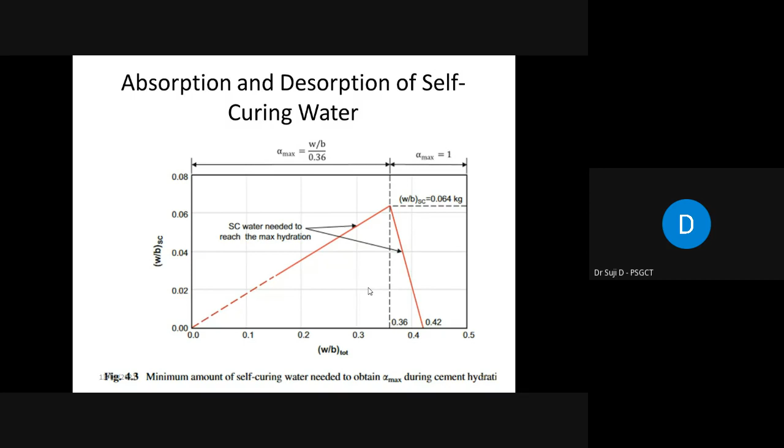So this is Powers' model. This is absorption and desorption of self-curing water. I leave this study to the audience. They can go with this Powers' model of absorption and desorption of self-curing water for their future research.

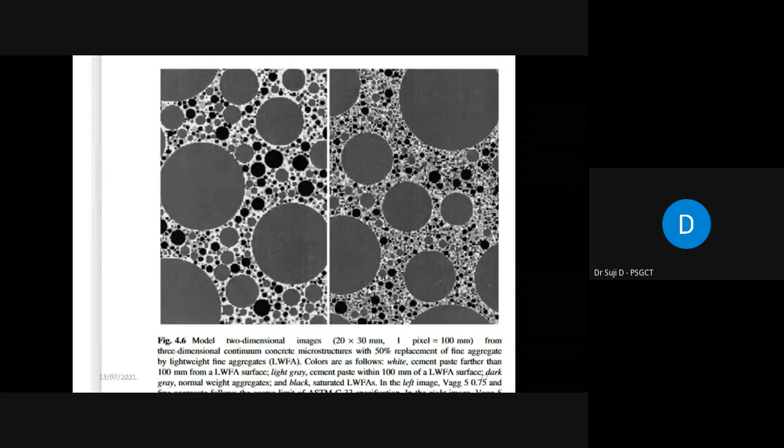And this is a model SEM analysis, three-dimensional continuum concrete microstructure with 50% replacement of fine aggregate by lightweight aggregate. This is one example case study, so I could not continue the presentation due to lack of time. You can read good interesting literature available on the net and go ahead with that work for your future research.

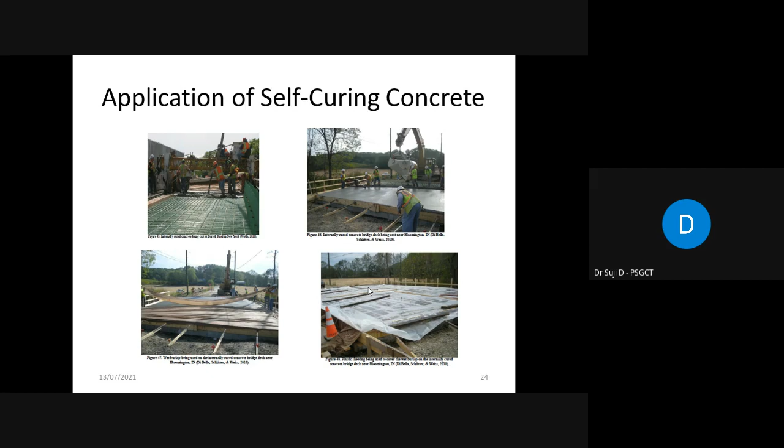But the understanding domain which is very much needed is the transport mechanism of hydrated cement paste, which is very essential. So regarding applications, most of the early age cracking occurs in pavements, bridge decks, slabs, etc. So this area is of much interest to transportation structural systems and infrastructure systems. It is very well appreciated.